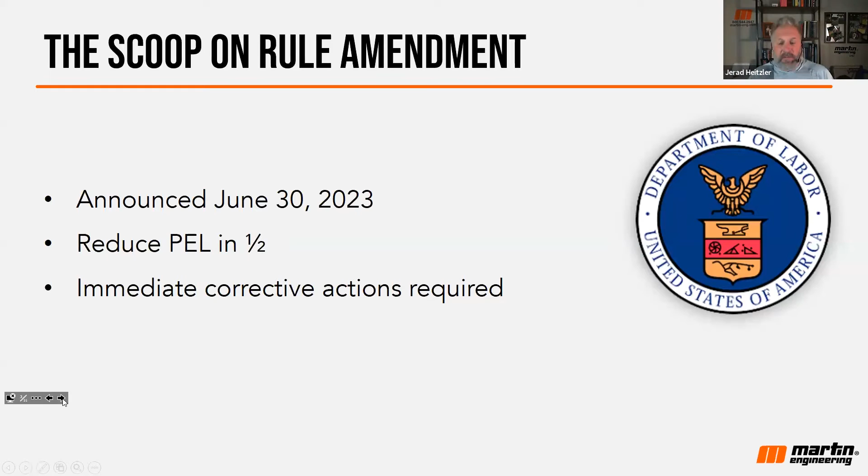Just a quick update as of Tuesday, December 12th. MSHA Secretary Williamson gave an update. I believe I saw this in Pit and Quarry magazine last week. Basically, he said that there will be an update published in the fall 2023 Unified Agenda of Regulatory Actions. That's not expected, although it's called the fall update, until after the first of the year.

More recently, there was some wording in last week's MSHA stakeholder call. So basically what MSHA does is every quarter they do a stakeholder call, and anybody that's a stakeholder in MSHA can join in, kind of hear from MSHA on what's going on in that world. Their most recent quarterly update was Wednesday of last week on the 6th.

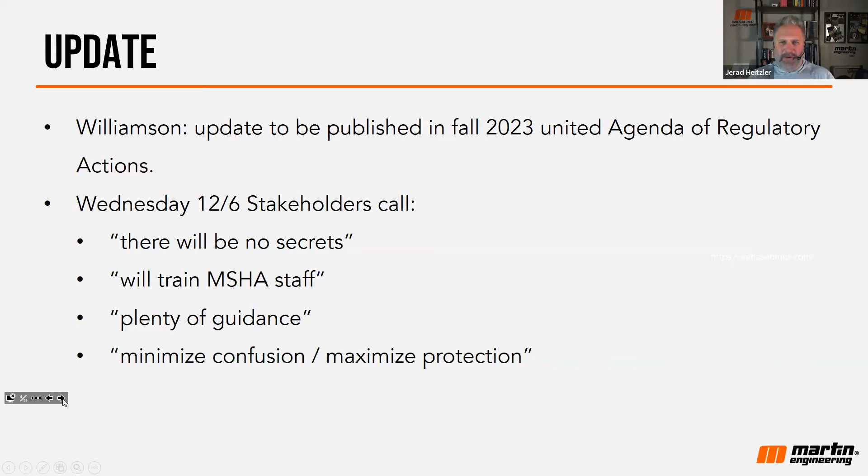And basically the comments, the quotes from that call were: there will be no secrets in regards to this. They will train their MSHA staff. There's going to be plenty of guidance on this rule, and they really want to minimize confusion around this rule and at the same time maximize protection against workers' health concerns that come along with silica dust. So it sounds like it's progressing forward. How soon you'll start to hear from inspectors, that's TBD, that's to be determined. But the language being used gives us a lot of confidence that this is going to continue to progress forward.

Three engineered controls that MSHA is going to recommend, or really require, mines to use to comply with this new rule. And those three engineered controls are suppression, collection, and what we call containment.

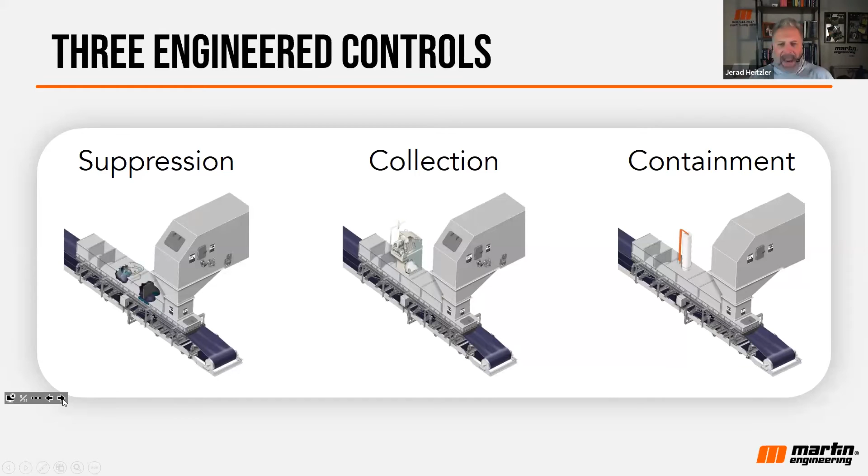Today, I want to talk a little bit further about containment. So containment is an engineered control that should help you comply, will help you comply with MSHA rules or dust that you might have at your facility.

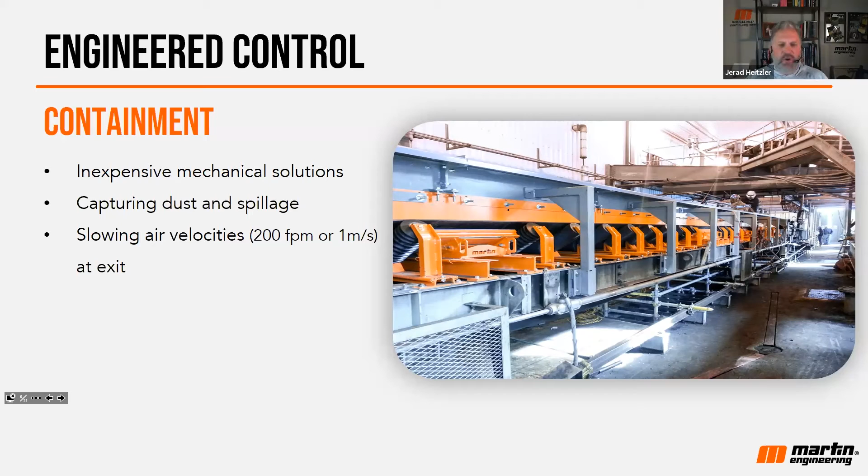Containment is a term that Martin Engineering coined many, many years ago. It's an inexpensive mechanical solution to controlling dust, and it's the idea of capturing dust and spillage before it escapes. And then this really important piece is to slow the air velocity to under 200 feet per minute by the time this air gets to the exit point of this chuted or containment area.

So let's talk a little more about containment and really what's the story here with this idea of containment. Now it is an engineered control. There's no reason why it won't help you comply with controlling dust.

And when we really look at dust, we have to take into consideration that dust is really a formula of the particle size, the cohesiveness of the material, and three, the velocity of air that it's exposed to. Let's break this down a little bit more here.

If you're using a dust collection system, that is really irrelevant to how much work you're doing to prevent the dust. If you're using dust collection system, fine, great, good for you. But dust collection is not doing anything to reduce the amount of dust that is created. It's letting as much dust be created as you possibly want inside of that transfer point, and then using mechanical equipment to vacuum it off.

Right? So what we can do, we can increase the particle size or the cohesiveness by using some sort of dust suppression. What we're going to talk about and what is highly recommended and highly effective is to reduce the air velocity. So you got to think of dust as cargo.

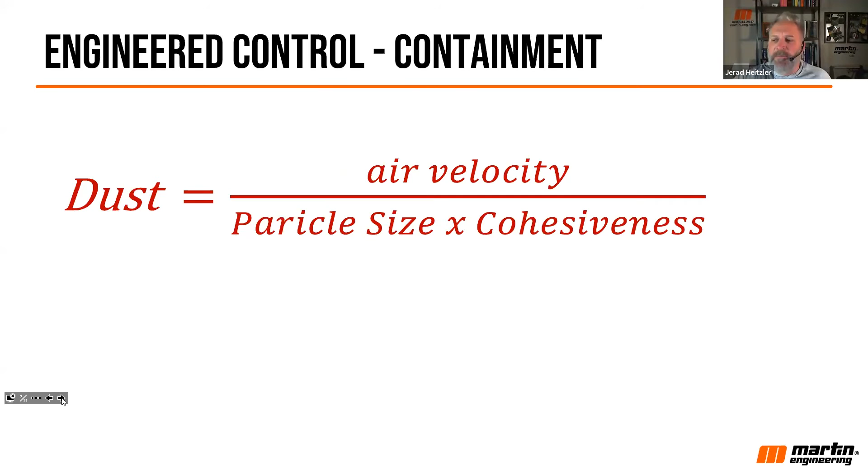You've got to think of dust as product that you're either going to sell or you're going to continue through the process. And that product is not problematic. The air that it's exposed to is the real problem, which creates dust. So we'll talk about how to slow that airspeed down.

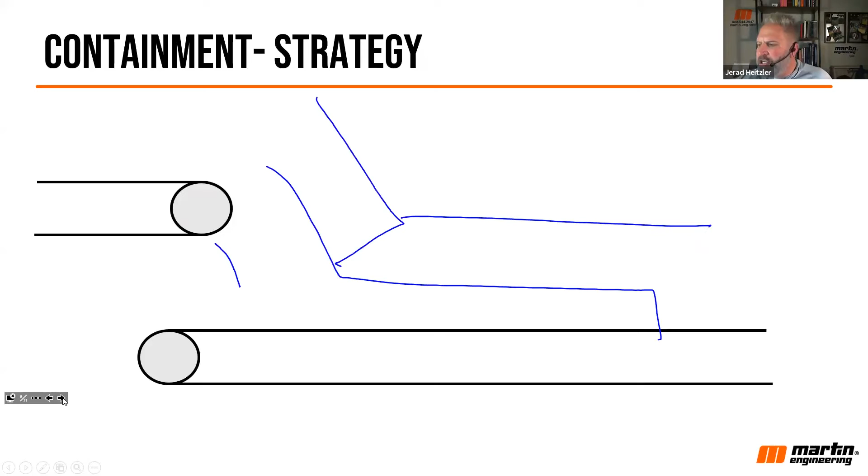So here's containment. If you've not seen this before, I'll draw it out for you real quick. This is our strategy of containment. If I've got a transfer point, basically material flows through this transfer point like this.

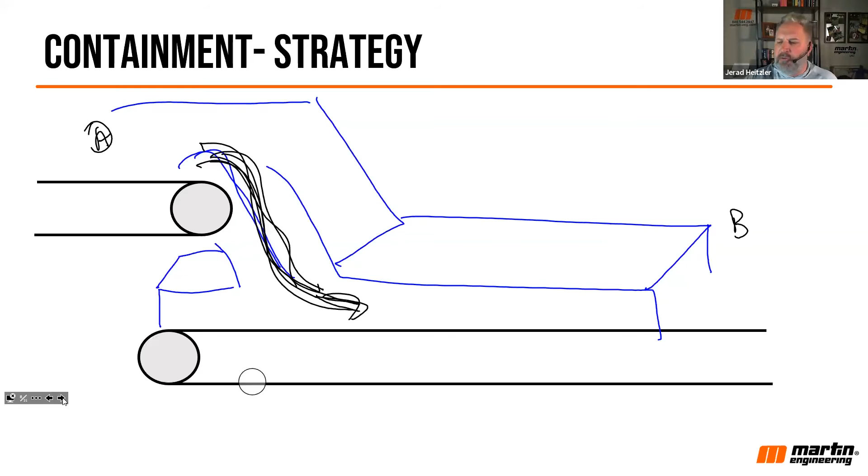As cargo travels through, the idea of containment is that no material can escape this chuted area until it gets to point B. We'll call this point A. This will be point B. By the time the material and the air gets to point B, we've slowed it to under 200 feet per minute. And you can do that with some quite simple mechanical devices here.

So techniques to slow air velocity. Number one of the most important things you can do is limit the amount of air entering this transfer point. This is really important. What goes in a transfer point must come out. The more air that you put into a transfer point, you will push out of a transfer point. The more air that you push out of that transfer point, the higher the speeds. So one of the most effective things that we can do to reduce dust is to limit what we put in to these transfer points.

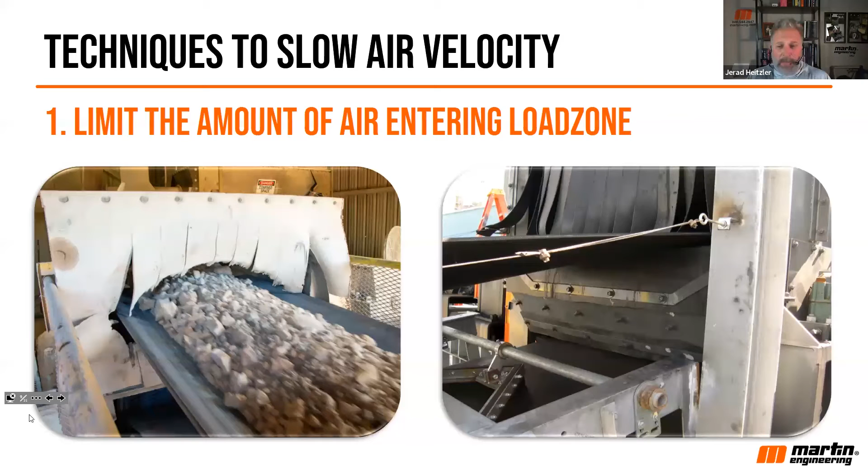And these photos are great examples of applications where the end user did a quick, inexpensive modification to limit the amount of air entering that load zone. They'll use simple mechanical devices, maybe a rubber curtain, like you see on the right-hand side, as that head pulley, as the cargo enters this load zone. Point A, if we refer to our previous drawing, we've blockaded off in these photos, restricted the amount of air going in, because then we don't have to deal with that amount of air at point B as it exits.

Another great example here. I wanted to show this one to you. I'm a little concerned with this photo because the rubber curtain is trimmed so close to what the expected profile of the material is. And that can cause some disruption of that material. So you got to be a little concerned with that. You want to restrict as much of that space as possible without disrupting that cargo as it enters the head chute. So limit the amount of air entering is number one.

Number two is you want to reduce what we call induced air. So here's what's going on here, gang. Induced air happens at every load zone. And as cargo leaves the head pulley, it spreads out. As that cargo spreads out, it surrounds itself with air. Every piece of material surrounds itself with a volume of air.

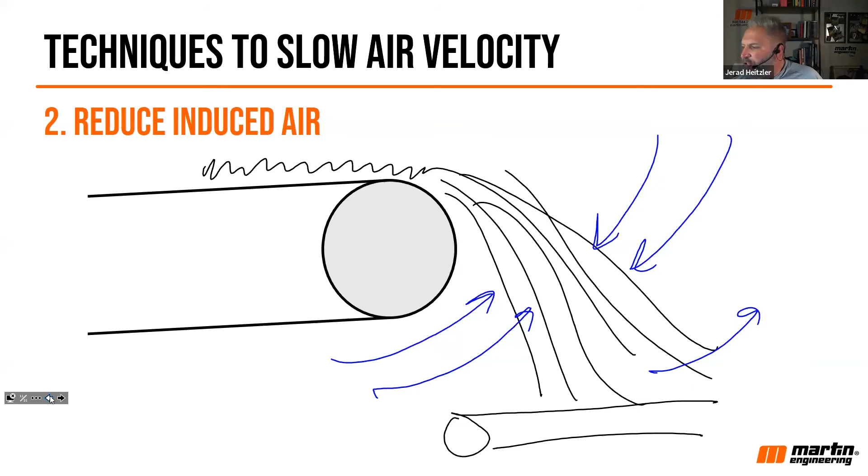Now we can reduce that by using our step one, but we can do another thing here by reducing the induction of that air. So what happens is as that material cargo pulls air in, it lands on a receiving belt, settles, and then it pushes that air out, and we've got to try to slow it. So what we're recommending here is reducing how much induced air you can take. And you do that by using some sort of mechanical device represented in this red to restrict the flow of material. So now that same amount of cargo pushes through, but in a tighter profile, and that reduces the amount of air that it induces.

Now, there's engineering companies, you might have heard of this before. Some engineering companies call them IFT technology, hood and spoon technology.

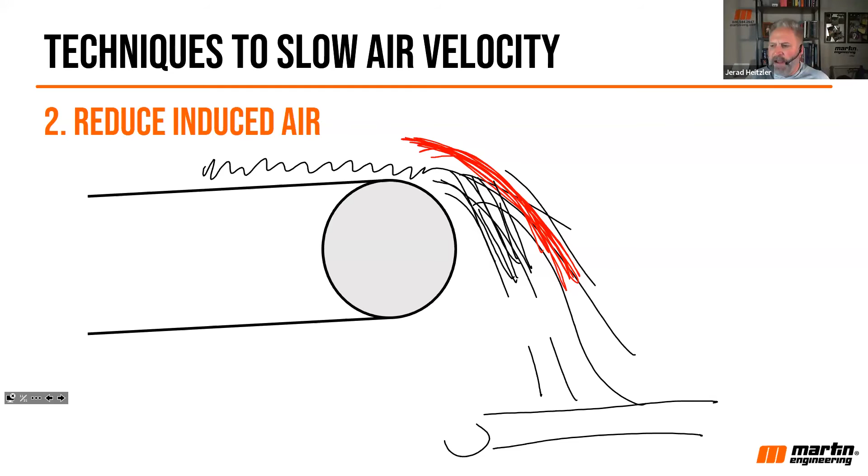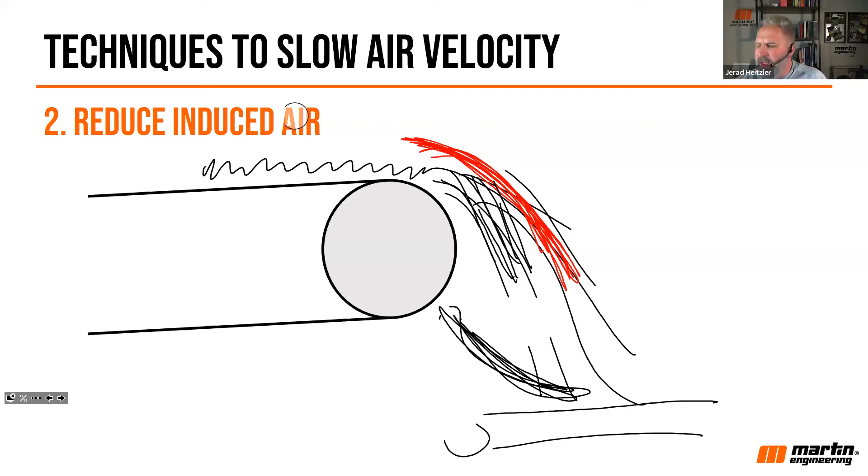Sometimes they can be quite complex, where you're using devices to restrict the flow of material as it comes off the head pulley and as it's loaded onto the receiving belt as well. Sometimes this technique can be quite complex and quite expensive, and sometimes it can be quite inexpensive.

I've seen instances where plants have hung some chains inside of their chute work like this. So as that material comes off, it hits those chains that are dangling down, and that might restrict it enough, or a little bit. Sometimes a rubber curtain on there can make a difference as well.

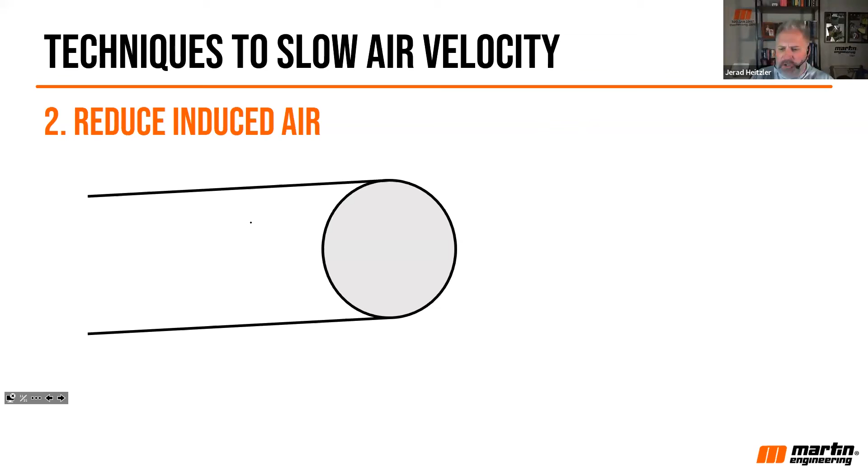I want to show you a picture of a job that we were impressed with. What they did here is they had cargo coming off this head pulley, just as you'd expect. Instead of letting that cargo just flow off that drum with intense speed and lots of induced air, they installed this hood device to restrict the ability for that material to spread out, and that reduces induced air.

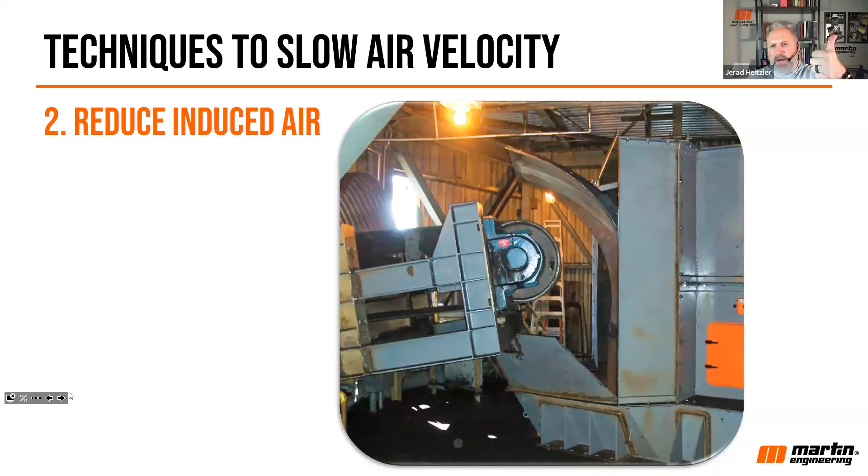So number one, limit the air entering. Number two, reduce induced air. Number three, limit the drop height. Now, this is more for those of you that are designing or building conveyors. If you've got existing structure, not much you can do with this. But you've got to recognize that the higher the drop of material, the more turbulence that you're going to have.

So if you can reduce, at the design point, the height of the material drop, that'll make a huge impact on your dust. So if I look at the diagram on the left, if material's only dropping, let's say 10 foot, I'm going to have a lot less dust than, let's say, material dropping further.

And let's really speed up this belt. The faster the belt, right? If this belt's traveling at X and this belt's traveling at Y, the faster the speed of the belt, the more trajectory of cargo you're going to have. And as that drop height increases and that trajectory increases, you're going to have a lot more air to deal with at point B. So if you can limit the drop heights, that's going to have an impact.

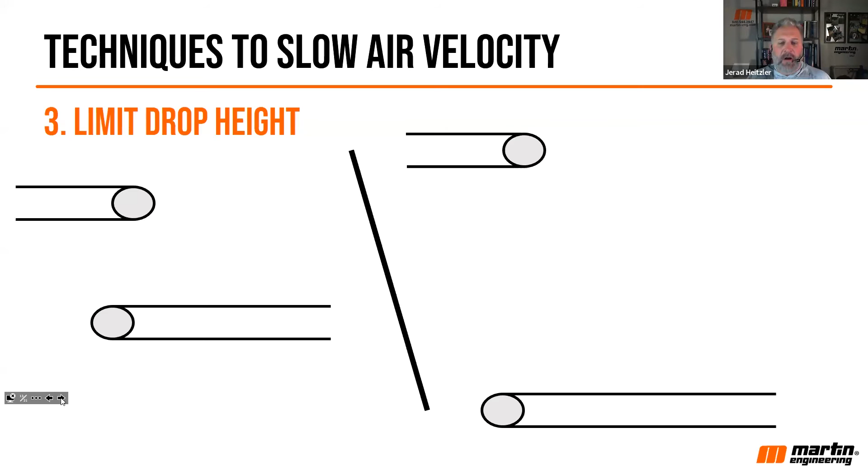Again, at the design point rather than after the point. If you reduce the drop heights, not only are you going to reduce dust, but you're going to reduce how much what we call impingement damage you might have on the surface of the receiving belt.

Now, this could cause some additional problems. You can have chute wearing out quickly. You can have material building up, and you might need to deal with that. But this is an incredibly effective way to reduce that drop height.

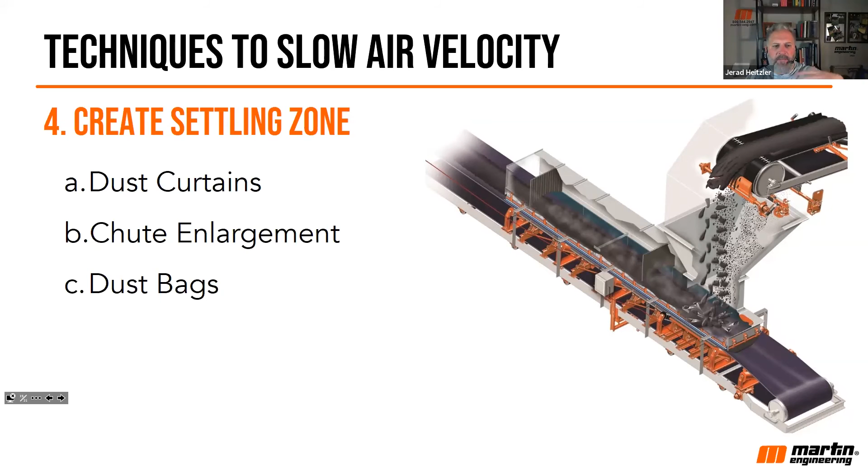So let's talk real quick here about dust curtains. Dust curtains can help you slow the airspeed down. The idea of a dust curtain is to allow the cargo to exit at that point B, but not allow the air to exit, or to at least restrict some of that air as it exits to under 200 feet per minute. This photograph on the right shows you a pretty good example of a dust curtain.

Note how it's set back from that point B. It's typical that we want to set that back about a belt width.

If we're using multiple curtains, which is sometimes necessary, you want to space those curtains out about a belt width apart. And it's a good idea to trim those curtains to match the profile of the material as best as possible.

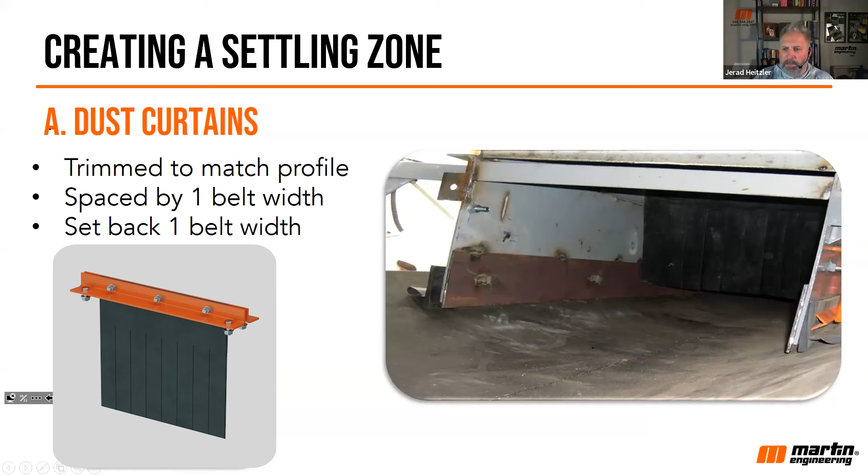So you want to increase the height of your chuted area, or settling zone as we call it, to push that air through at a slower speed. And if you increase the length of that settling or stilling zone, you can add additional curtains.

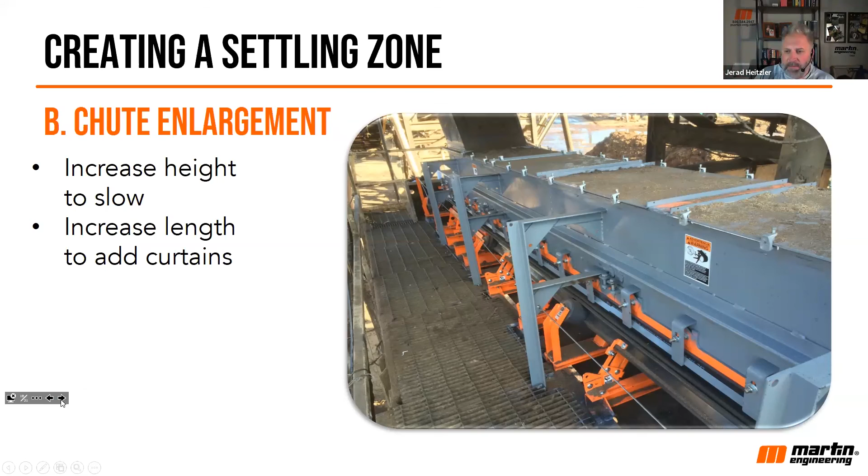And then finally, C, I need to talk about this. I haven't talked a whole lot about dust bags here for a while, but this is really, really important. I did an online class just last week for a grain handling company in the Midwest. They're handling grain, grain is explosive, the dust is explosive, and the dust is problematic for them as well, although it's a different type of dust than what's typically found in a mine, but just as problematic.

So what these grain facilities had used in the past, and they wanted me to focus on this in the class I taught for their group, was these dust bags. The idea of this dust bag is that the air is pushed through a transfer point, and what you would do is install a curtain — okay, there's your angle iron — and as that air hits that curtain, it's pushed up into these airbags or dust bags.